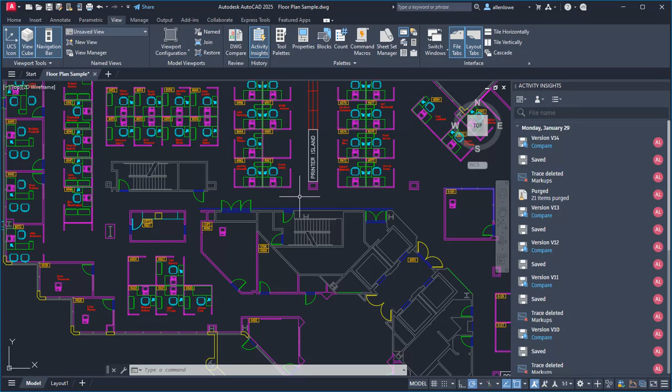Activity Insights now logs more activity types and displays more detailed information about these activities to improve collaboration. One of these new activity types is Version Activity, which replaces DWG history.

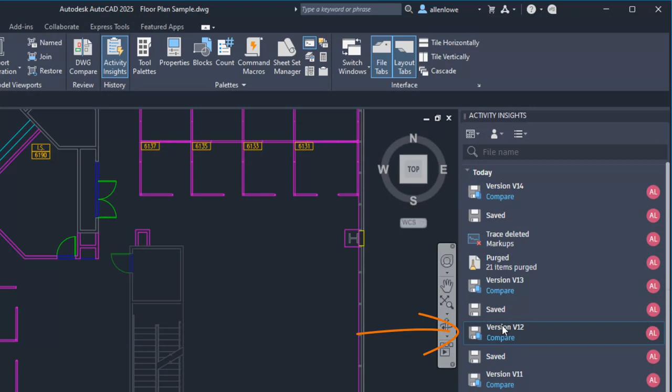Let's see this in action. When a file is saved on a supported cloud storage provider, a new file version appears as a version activity on the Activity Insights palette. Click Compare within the version activity to view the differences between the current and previous version. The new Activity Properties panel provides further information about these changes. Click Exit Compare to end the comparison and close the DWG Compare toolbar.

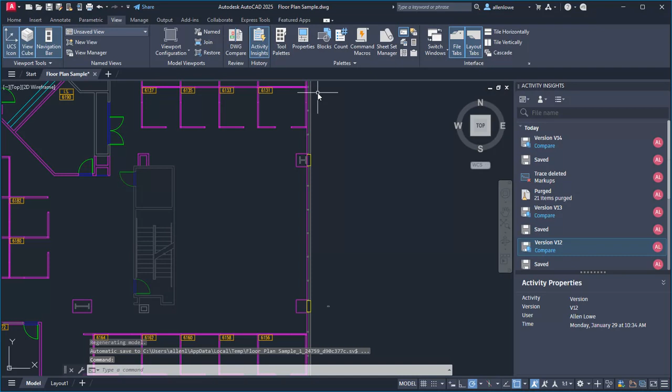Activity Insights also logs purged activities in AutoCAD. Here, the Activity Properties panel shows how many total items have been purged, as well as how many of those purged items were blocks, dimension styles, layers, multi-leader styles, or text styles.

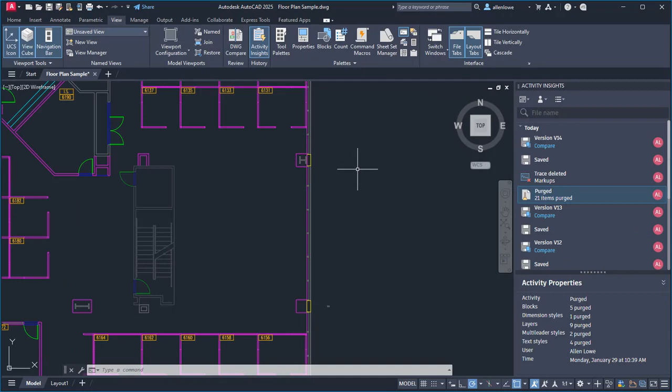Additionally, you can view activities to your drawing without opening the file. From the Start tab, click the vertical ellipsis and choose View Activity Insights.

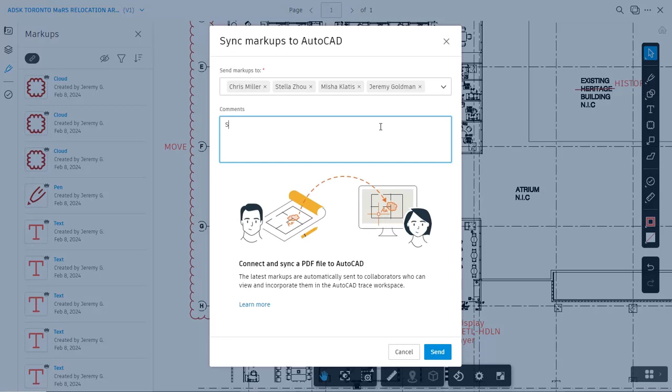Building on the improvements we made to Markup Import and Markup Assist in previous releases, PDF markup files now sync from Autodesk Docs to AutoCAD, making it easier for drafters and reviewers to collaborate. When you sync a PDF file that contains markups, collaborators can view those markups directly in AutoCAD in the Trace workspace.

Once the PDF markup file is synced with a drawing, any updates to the markup file made by a reviewer in Autodesk Docs will be visible to the drafter in AutoCAD.

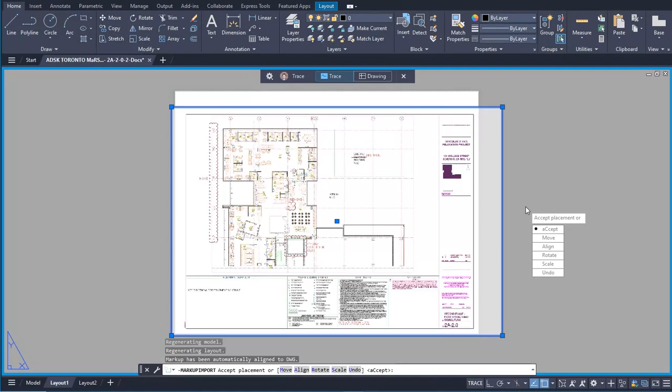Now you can convert multiple instances of repeated geometry into blocks. I'll convert this office chair into a block using the new bconvert command. I'll select this office chair for conversion and press Enter.

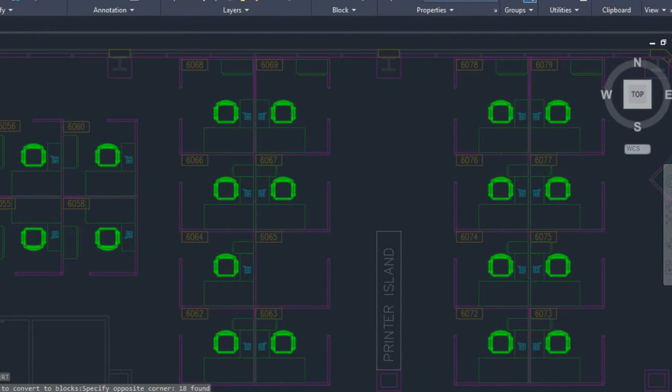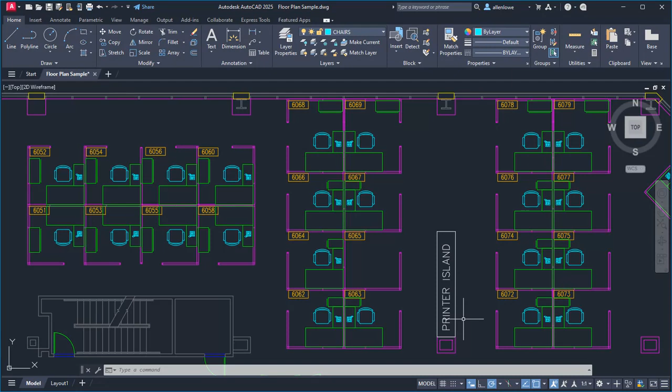Notice all instances of the same geometry are highlighted. In the Convert dialog box, I can choose to replace these instances with an existing block or convert them into a new block. I'll select New Block, give the new block a name, and click Convert. All of the highlighted geometry has been converted to blocks. This Smart Block solution provides a more efficient way to organize your drawings.

We'd like to introduce a new technology preview called Object Detection. This feature can analyze drawing geometry for objects that can be converted into blocks. This can be useful when importing a PDF.

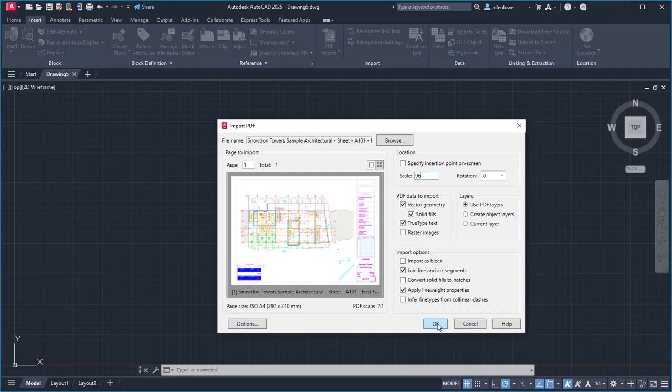When a PDF is imported, the geometry used to create the objects often consists of lines, arcs, circles, and text. Working with individual objects is often not an efficient way to edit a drawing. I'll use Detect to identify objects such as doors, sinks, and other fixtures that can be converted from individual objects into blocks.

With the objects detected, I'll use the arrows in the detection toolbar to move from one set of objects to the next.

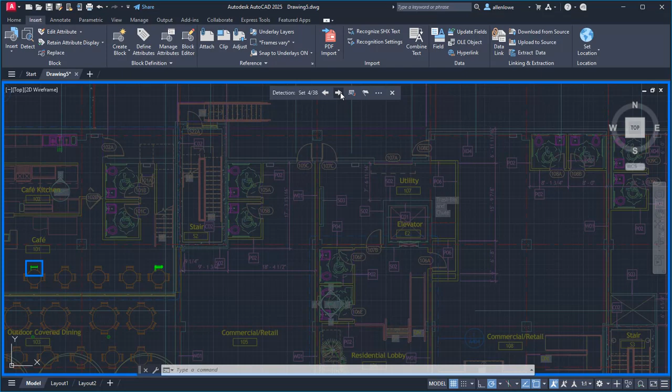I'll click the box around the primary object and select Convert. In the Convert dialog box, I'll convert this detected door made up of lines and arcs to a new block called Door. All the detected objects in the set have been converted to a new block.

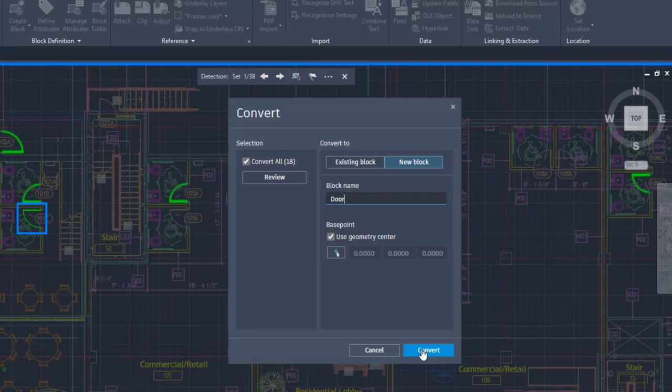Object Detection is a technology preview with enhancements and functionality planned for future releases. To report an issue, click the flag icon in the detection toolbar.

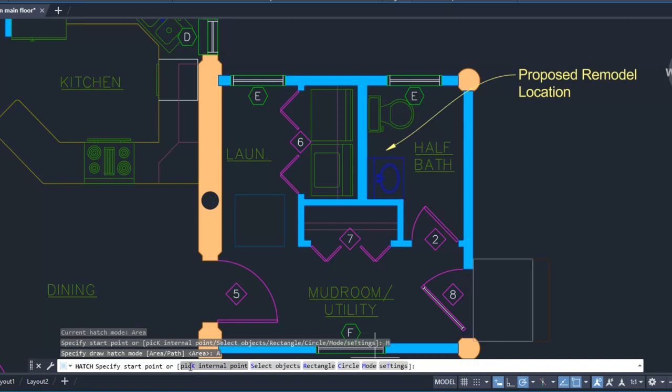Hatches can now be drawn without pre-existing boundary geometry. Create a filled shape using the rectangle or circle draw options, or hatch along a path using the polyline option. In this demo, I'll draw a rectangular hatch over this area of the drawing.

We added Esri maps to geographic location. In addition to Bing Maps, you can now choose from 5 new Esri map options to add geographic location information to a drawing.

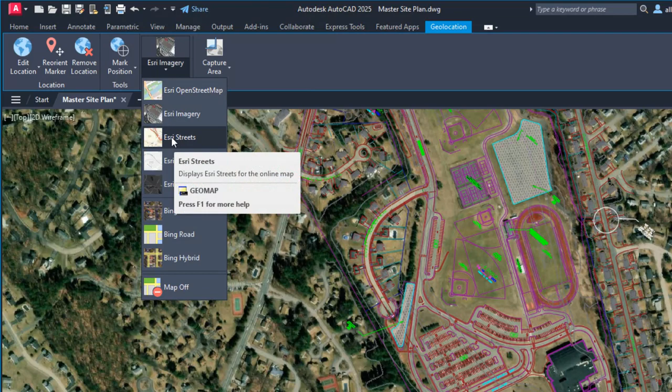The Graphics Performance dialog box includes a new Diagnosis tab, which shows you the status of your graphics card configuration. By checking this Diagnosis tab, it's easier than ever to pinpoint whether you need to enable hardware acceleration, update your graphics card driver, or upgrade your graphics card.

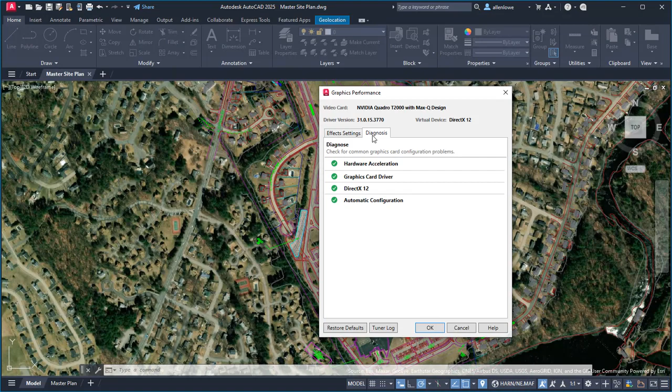See the product help for a complete list of new commands and system variables related to the new features.